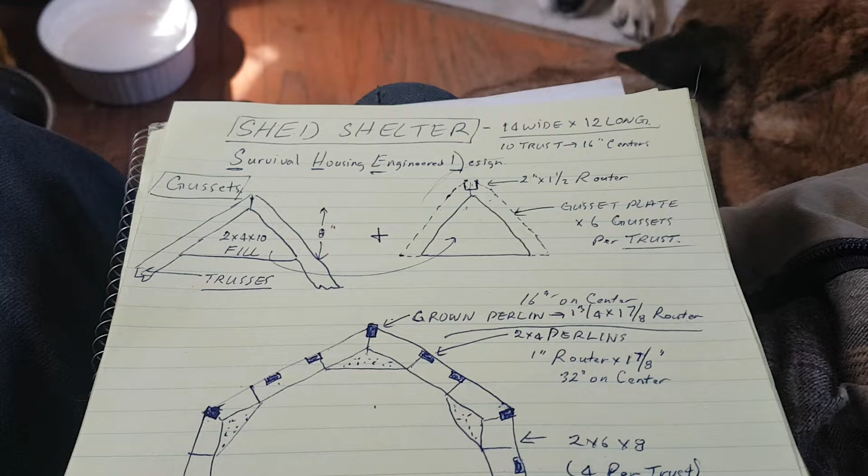I kind of drew this up quickly, so you guys can get out there and buy the material. Then I'll show you how it goes together.

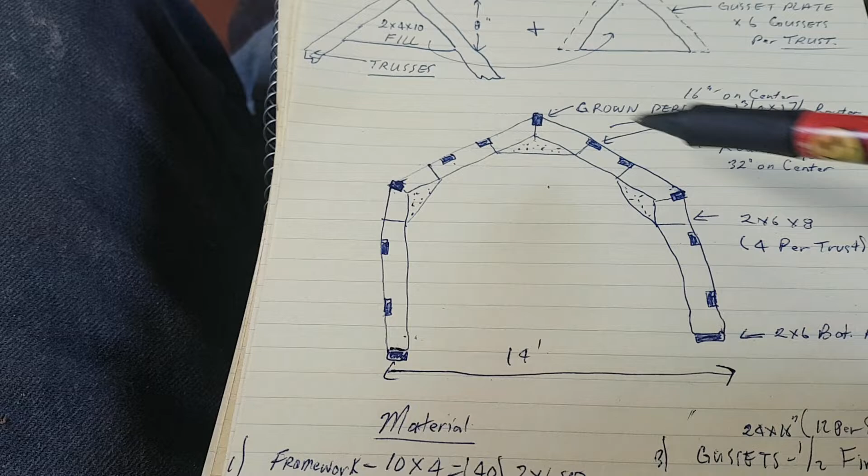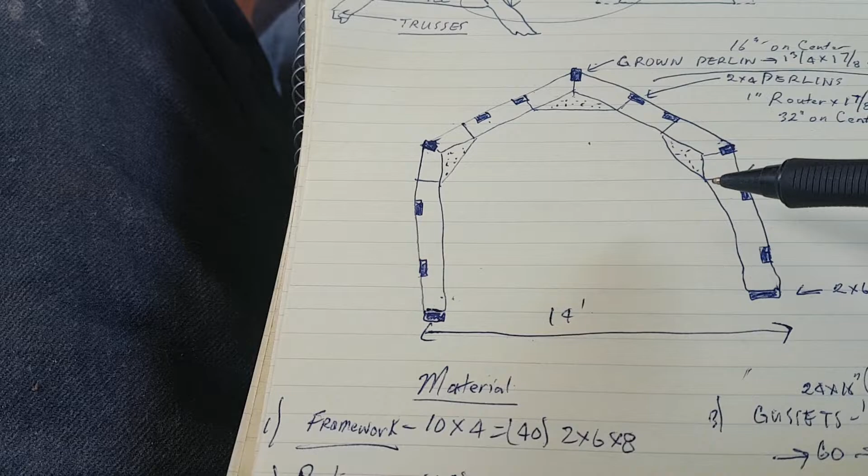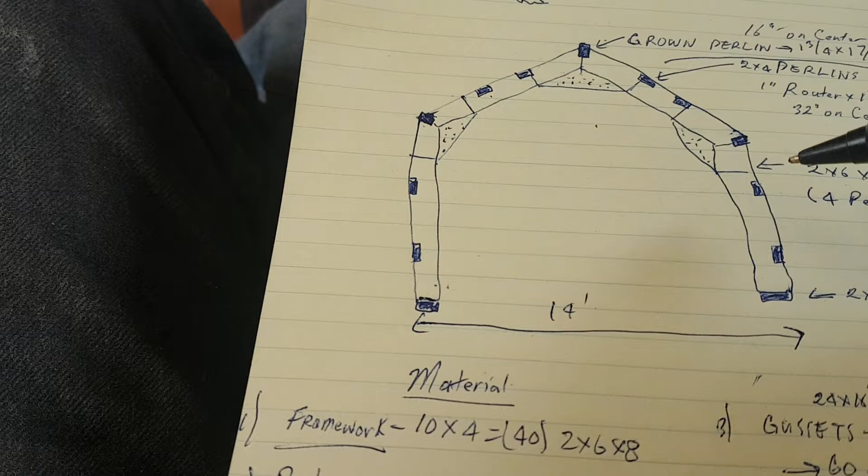Basically, what you have, these are 2x6s. You got 4 of them, and all together you would need, if you got 10 trusses, that would give you a cabin 12 foot long on 16-inch centers. You could place them at 24 centers or 32 centers, so you'd have to accommodate your purlins to adjust for that length.

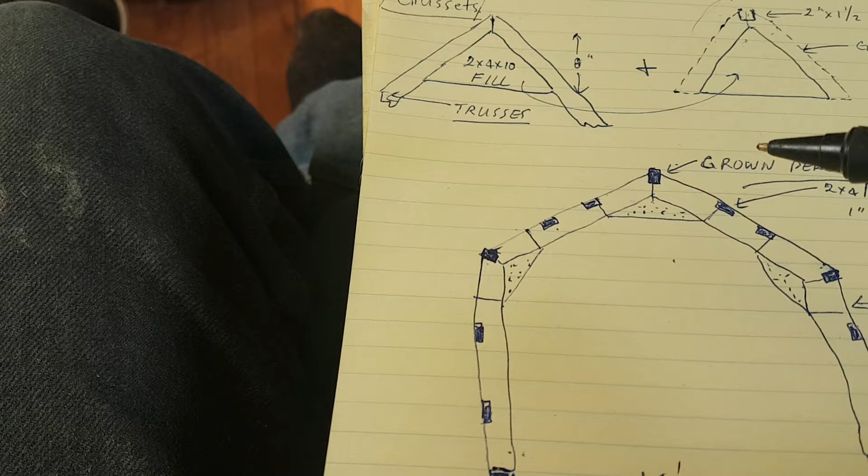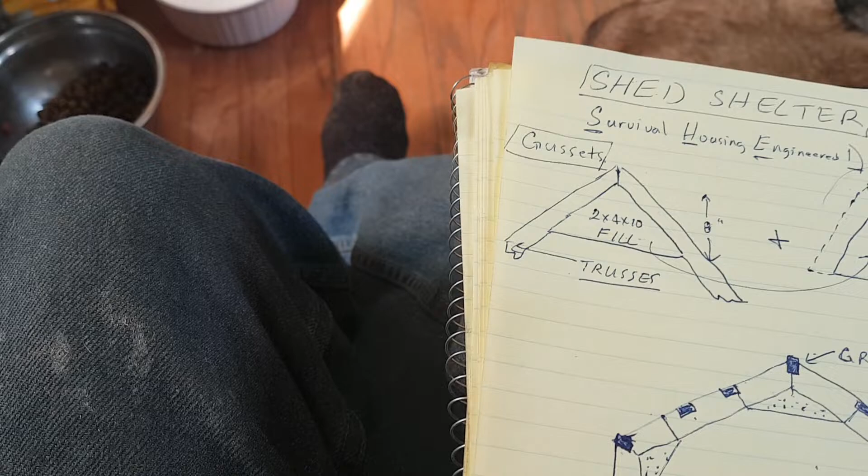But anyway, the main thing that makes this work is the Gusset Assembly. So this is your 2x6s here, right? This is where they're mitered together.

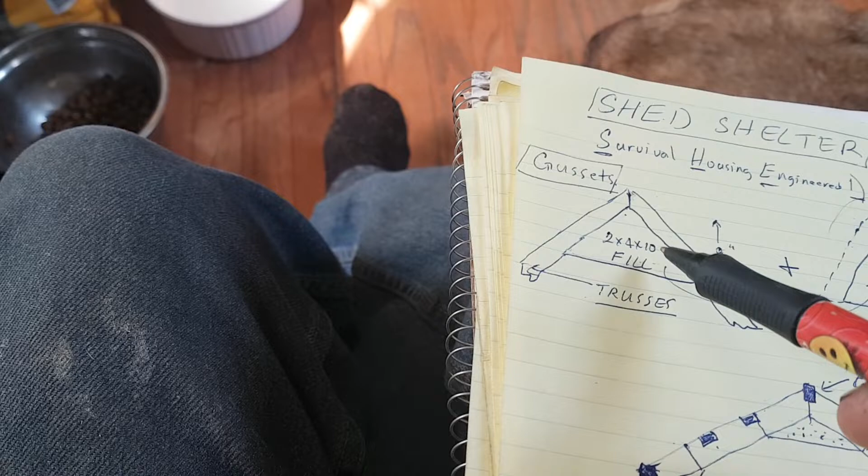As long as you know this angle, the first thing you want to do is pre-make your fill. So this is a piece of 2x4. You just draw your angle, set up your chop saw, and cut all these out. Make sure your saw is sharp and these are square, and you want your accuracy.

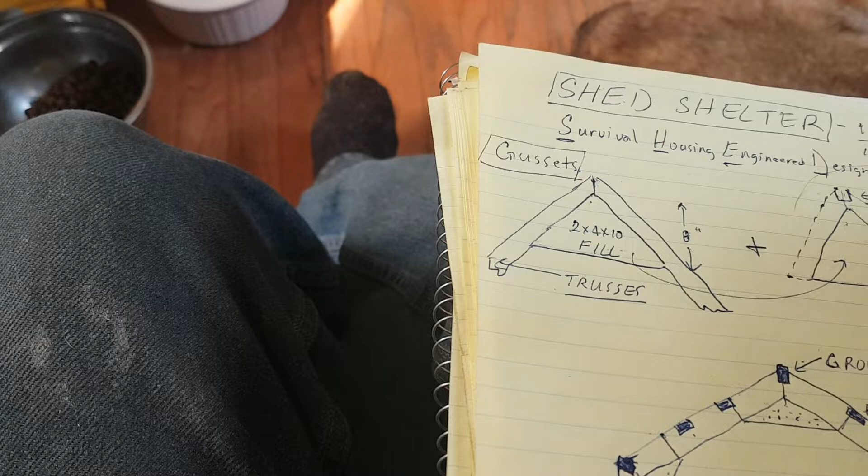Then you want to make your gusset plate out of 1/2-inch fir. Don't use OSB, spend the money and get 1/2-inch fir plywood.

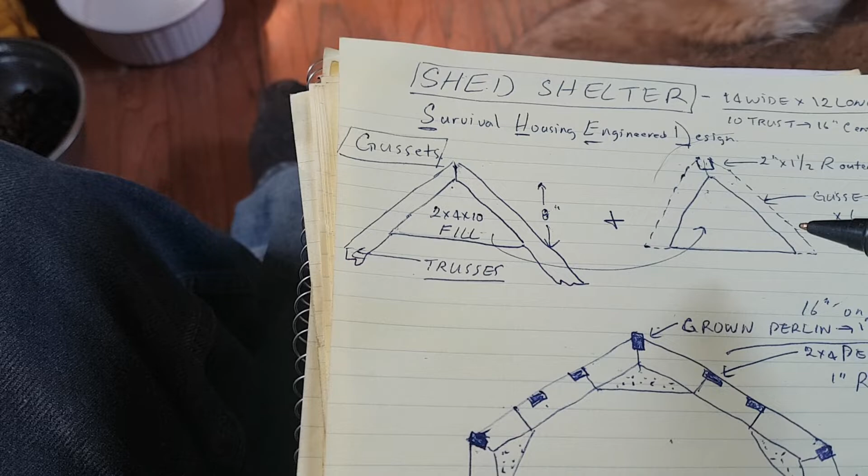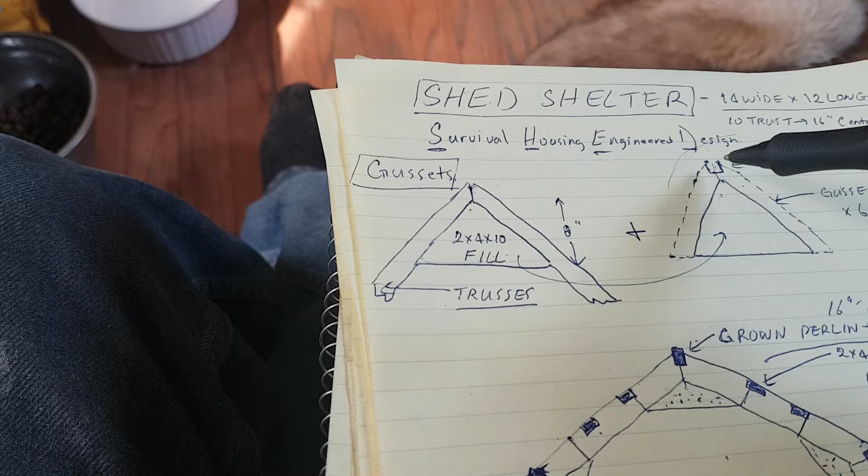Basically, your gusset starts from the bottom, so you have about 8 inches up to here, and if you're using 2x6, you would add another 8. So you actually use your gusset, if you're cutting it out square, it would be 24 by 16 inches high. You'd actually get 12 of these out of a sheet of plywood, so you need 5 sheets of plywood.

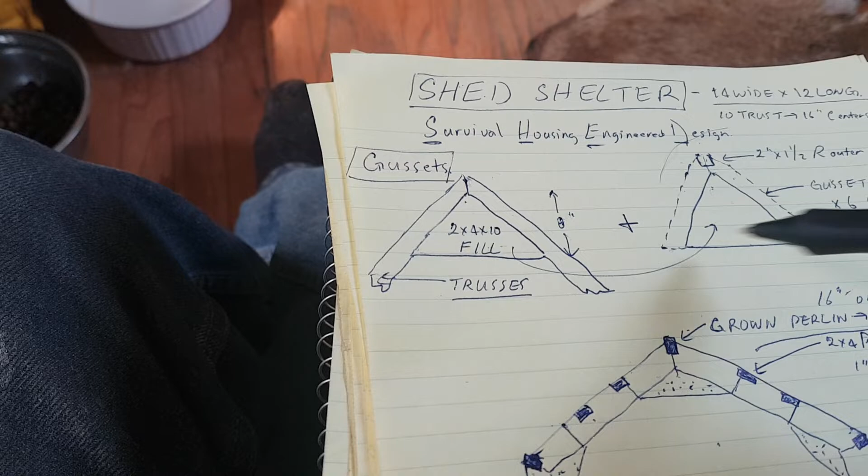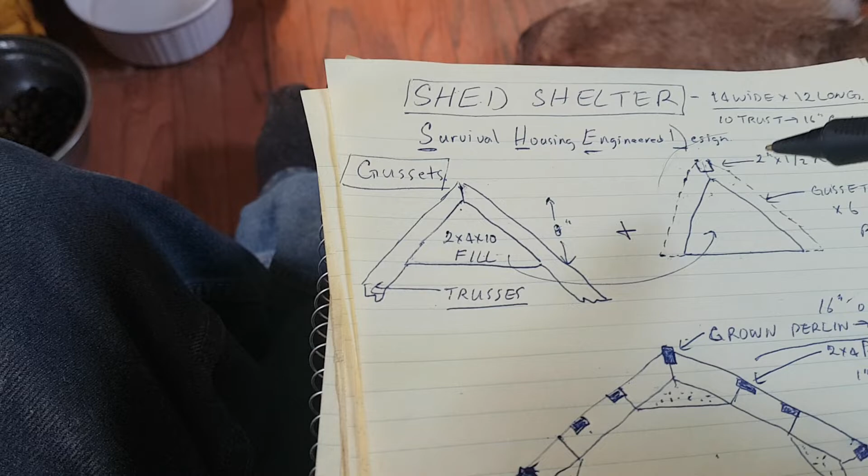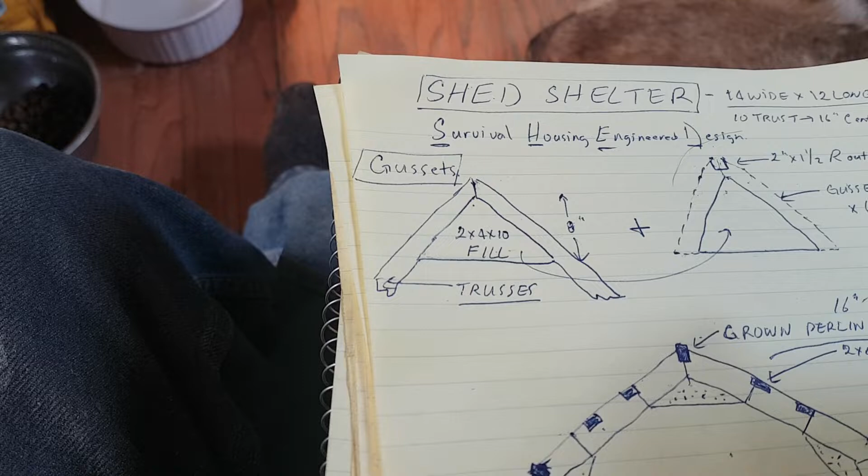And then you can set up your jigs to router the edges, trim off the edges instead of using a sander, and you can set up a jig to cut these out. You could probably do 6, because there's 6 of these per truss, so you could probably do a set of 12 at a time.

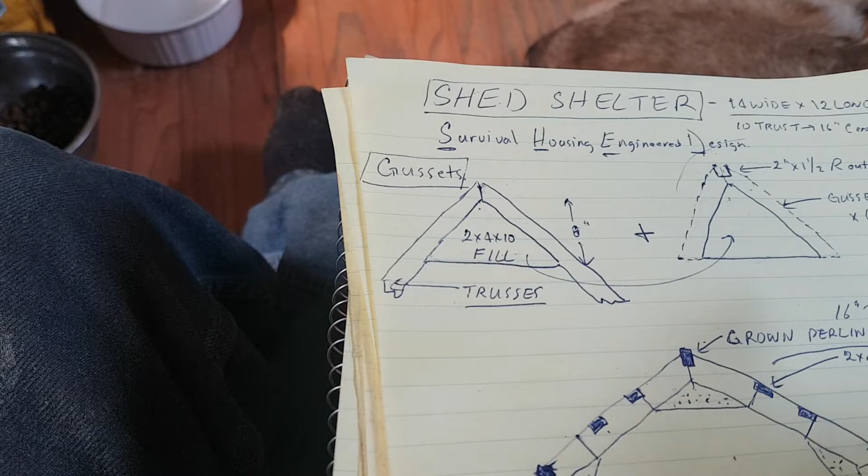So your main tool of choice is going to be your chop saw and a good router. You need a heavy-duty router.

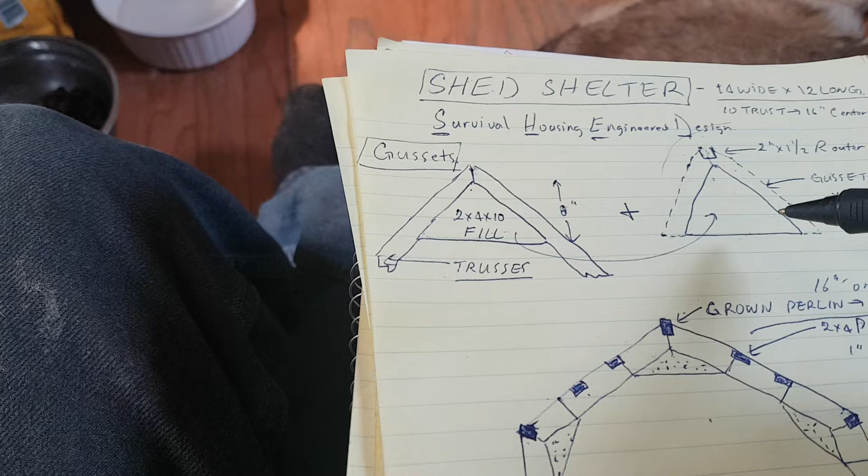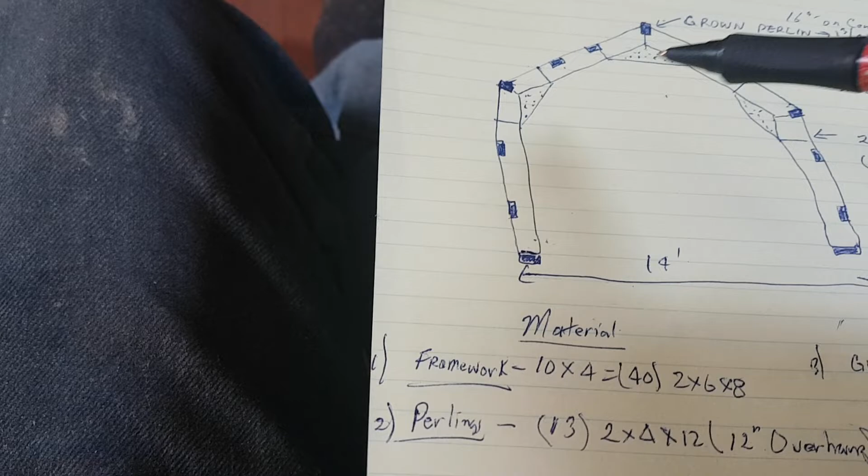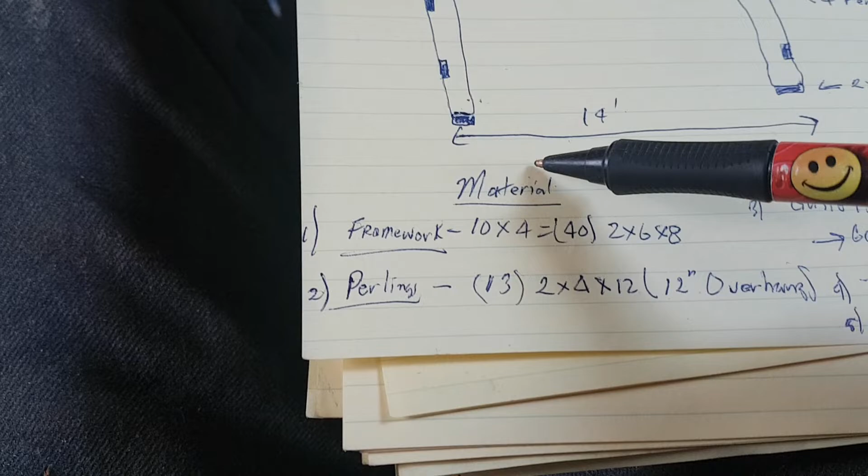So the overview on this: for material, you will need, if you're using this, 120-degree corners in here - I think they're same as a honeycomb. You will need 4 per truss, 10 trusses, that's 40. 2x6s by 8.

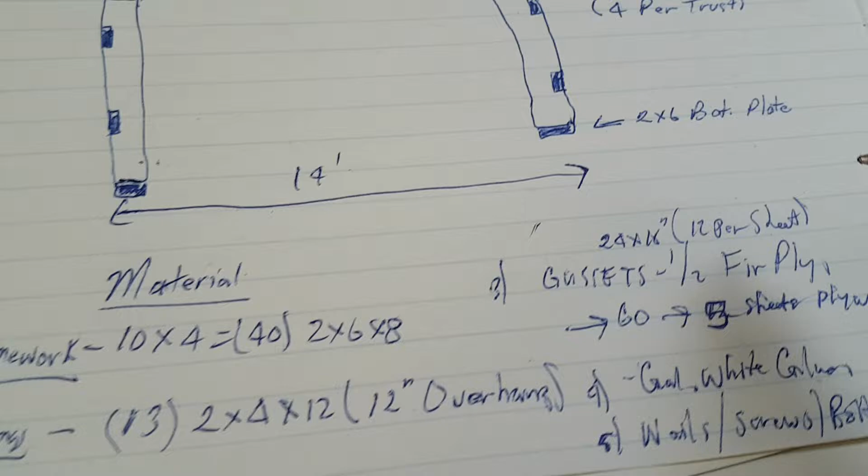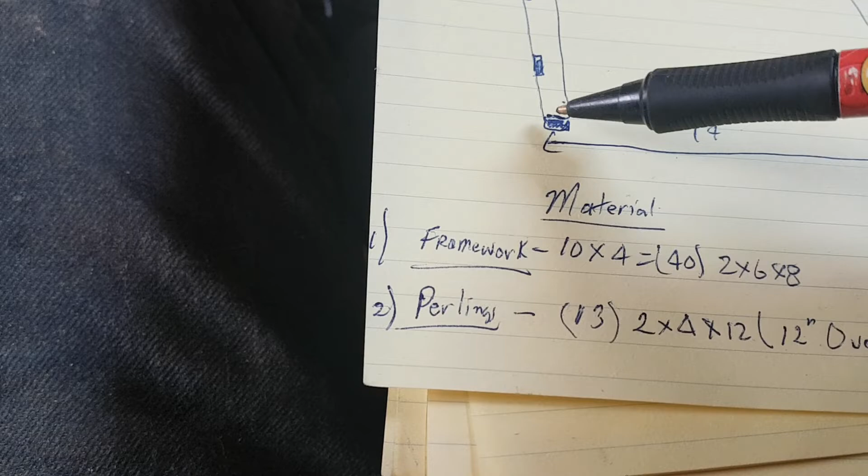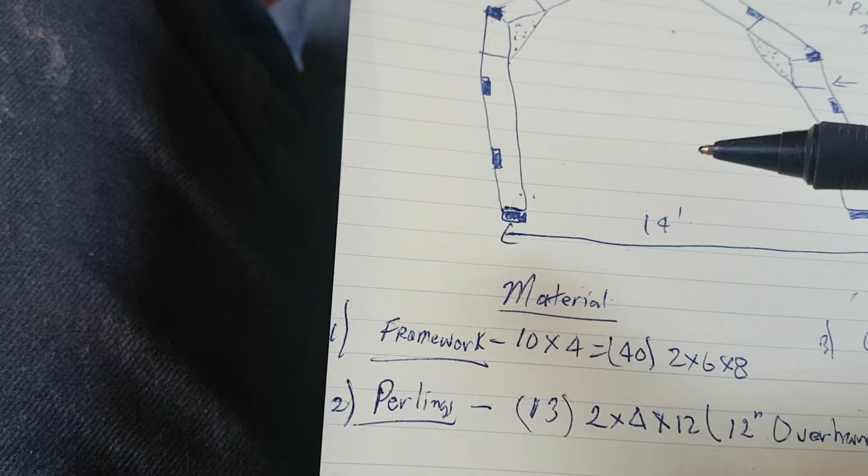You need 5 sheets of 1/2-inch fir for your gussets here. And for your purlins, which are these here, you need 13 per truss, and you could leave them at 10, but it would actually get 12 foot lengths, so you'd actually have a little bit of an overhang, a little bit of a cover.

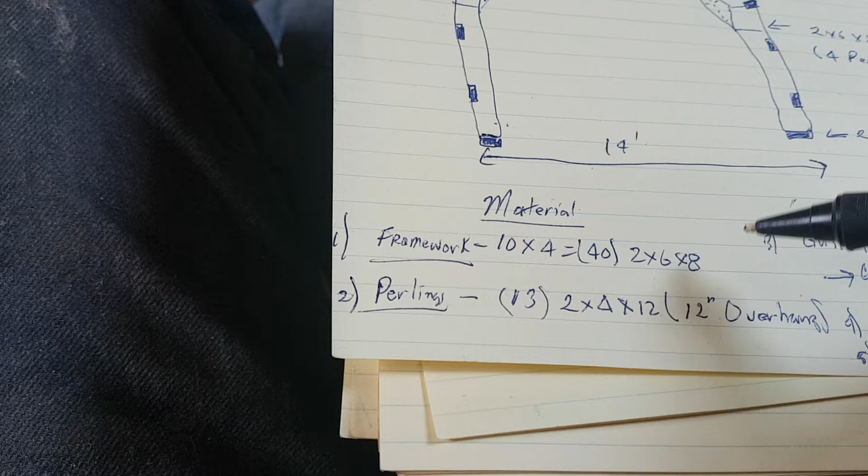So you would need 13 per truss times 10. No, just 13 per truss - 13 12-footers. That accounts for your feet.

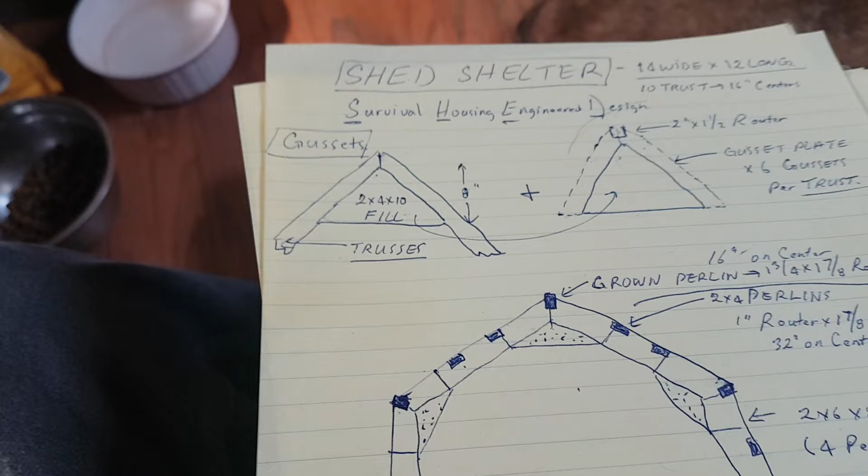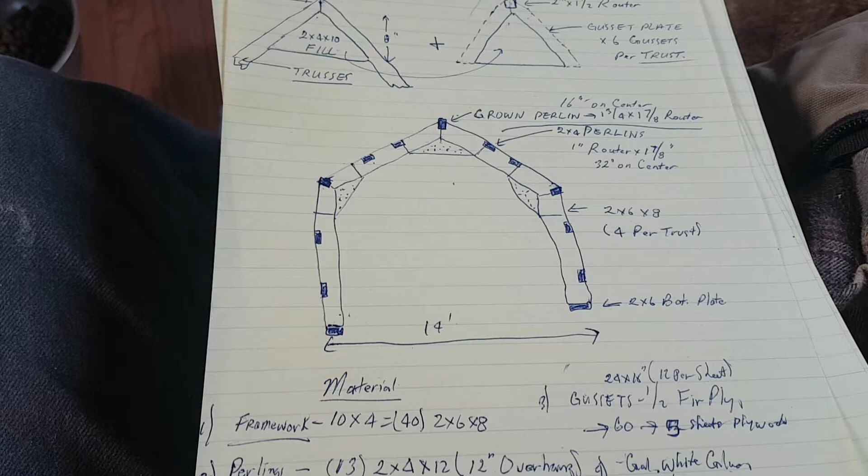So just going to put this up like this. I don't want to turn the camera. So you can enlarge this and just mark down the data.

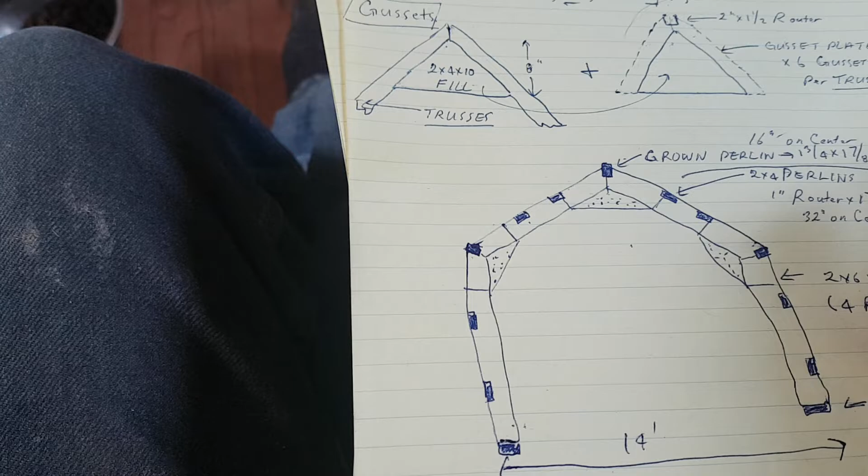But if you got a large nailing table, if you make your jigs, these can be fast tracked. You want to use glue on this here, white glue.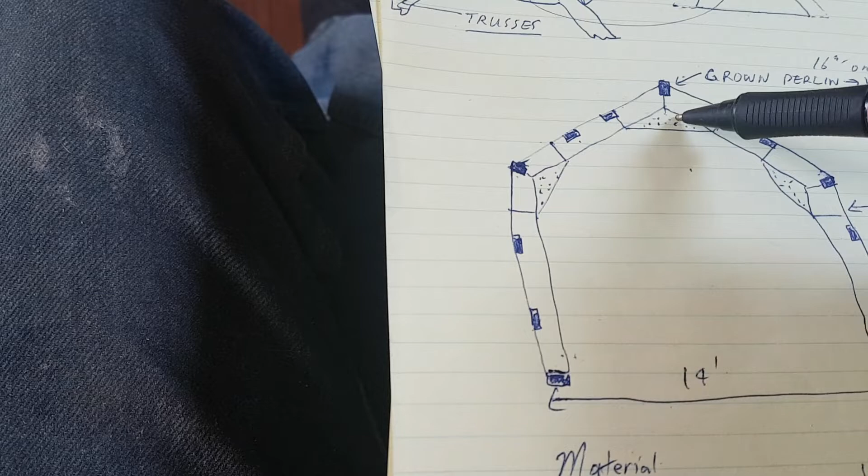And for nails, like these here would be nailed together. All your gussets, you can pre-make in advance, so they're all ready to go.

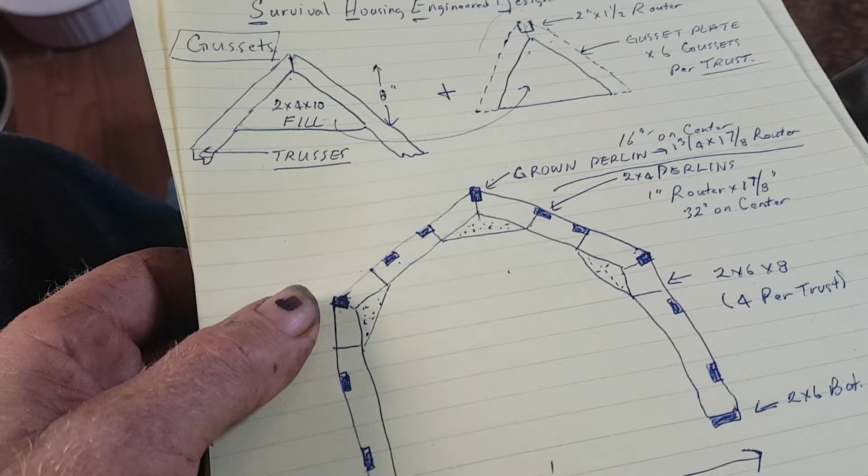And so you glue and nail this down, and you'd use a 2-inch galvanized, or you could actually put pound-in twist nails or ring nails.

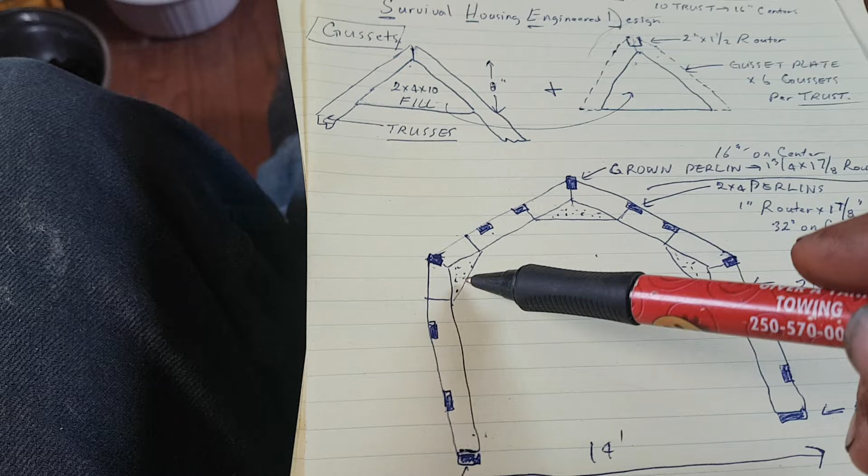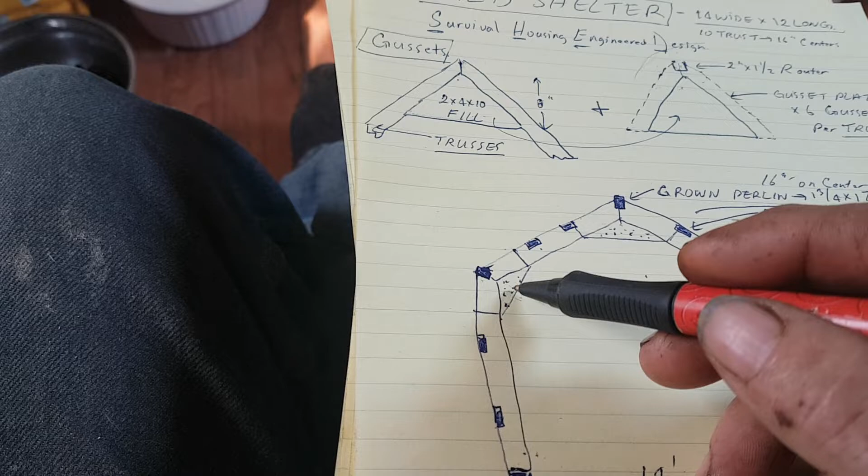But if you're going to mass produce these, you get yourself a framing gun, and you want to make your templates out of paper. And when you make your nails, you put your nails on 2-inch centers, then you make a reverse pattern for the other side so your nails don't bump into each other.

Yeah, that'll work. I'll show you that when I get to that point.

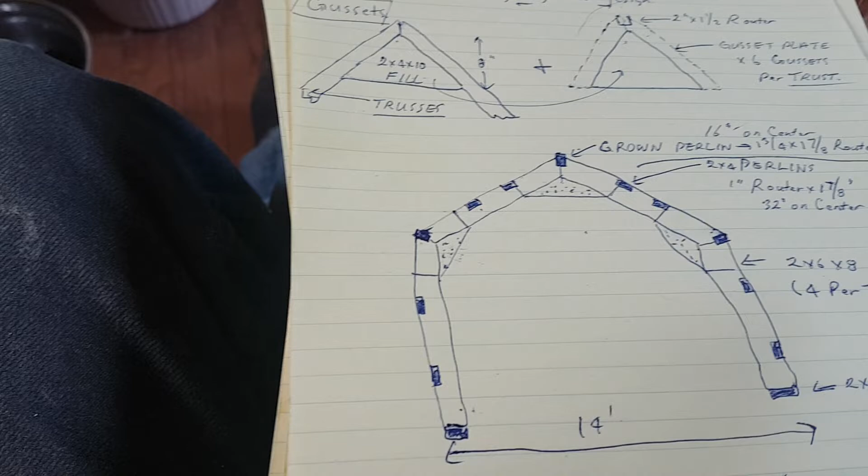So this would give you, when you got your trusses made, I think in the next design I would split it here, and I would split it here. Leave this as one setup.

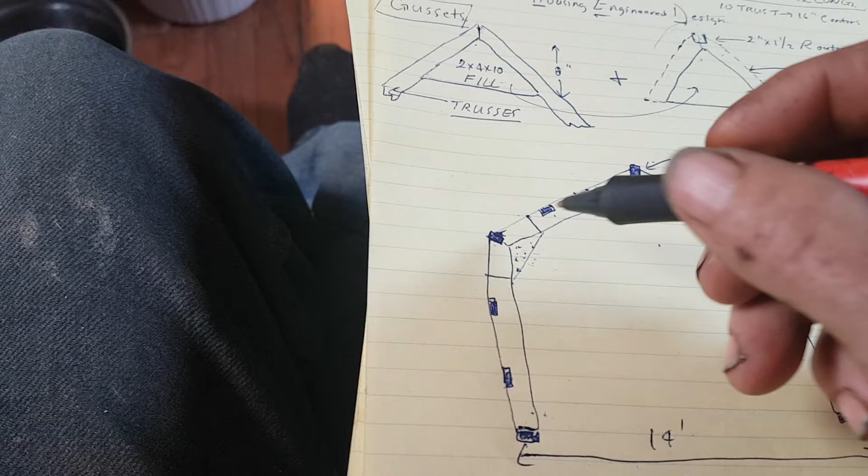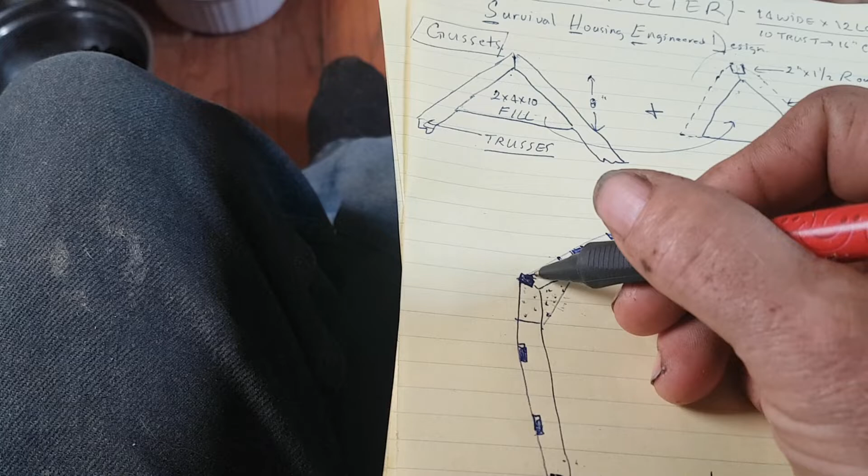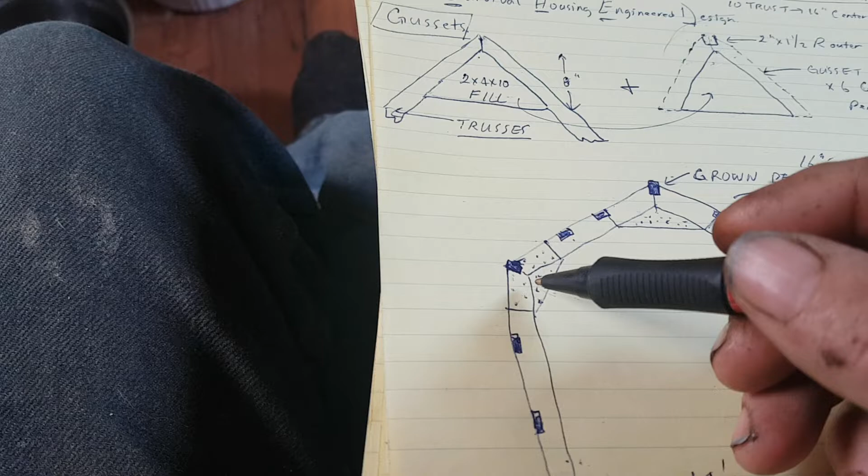So you just lay them down, make your first truss on the ground. You would have bolts here, like that. You need 3-inch bolts, just grade 5 fender washers. And these are all pre-drilled. All you do is fasten on your side walls and your roof components, right?

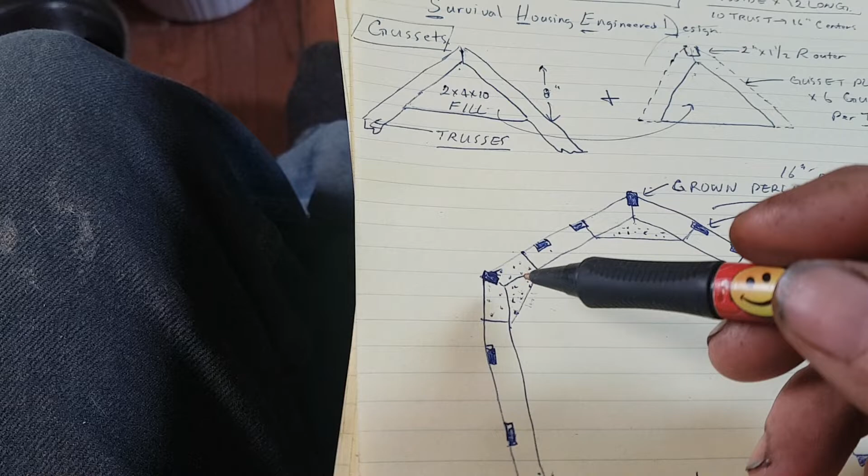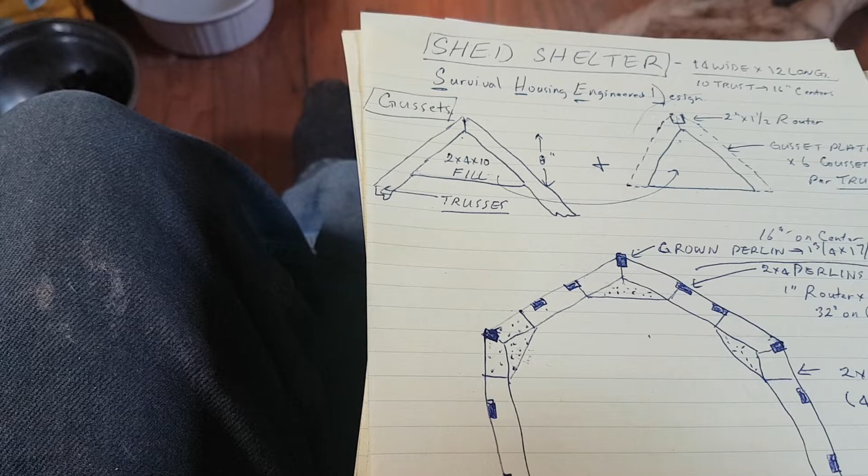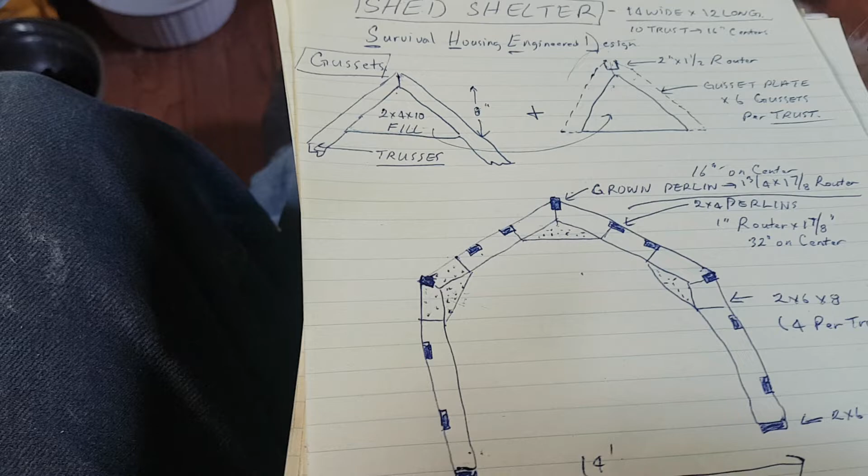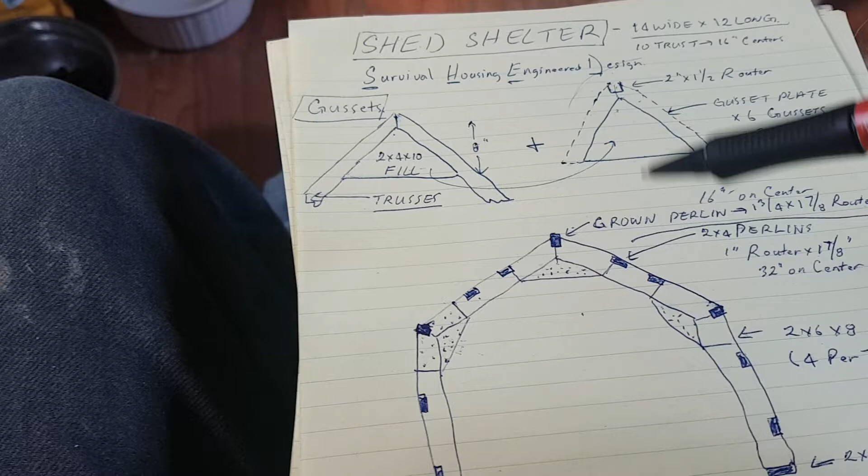Once you got the first one made, it's nice to have a table that you can work from. You can set them all up, so all your trusses are set up on a table. Once you got the first one set up, you have to hold it in place, and you can use a rope and a pulley system to lift them up, because it's a lot easier than even having 2 people. You just drop your legs to the ground, and you pull up the peak with the rope right there.

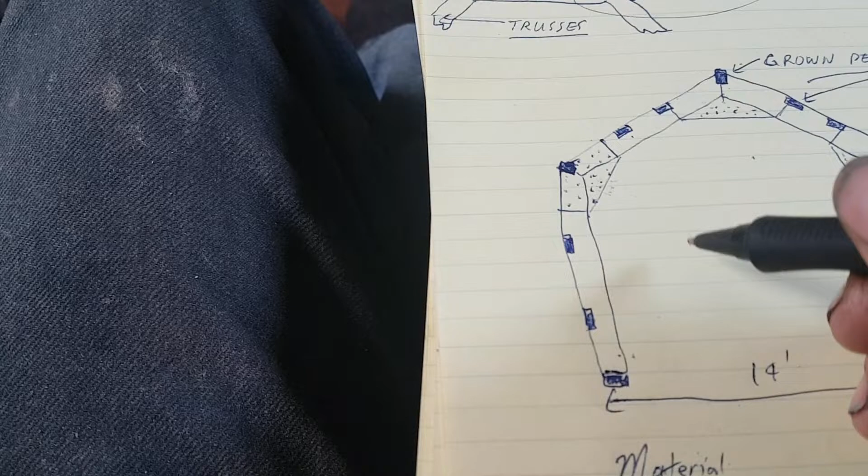And if you got your feet, let's see if I can draw this out for you. I want to draw out the bottom part. So this is your bottom plate.

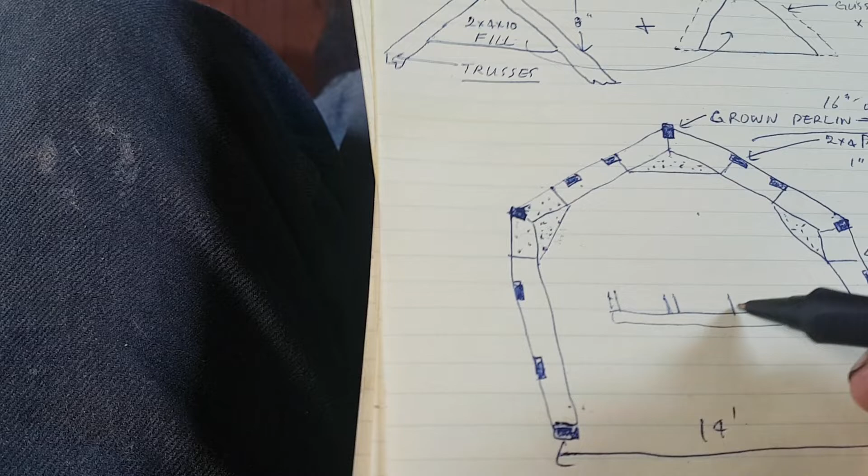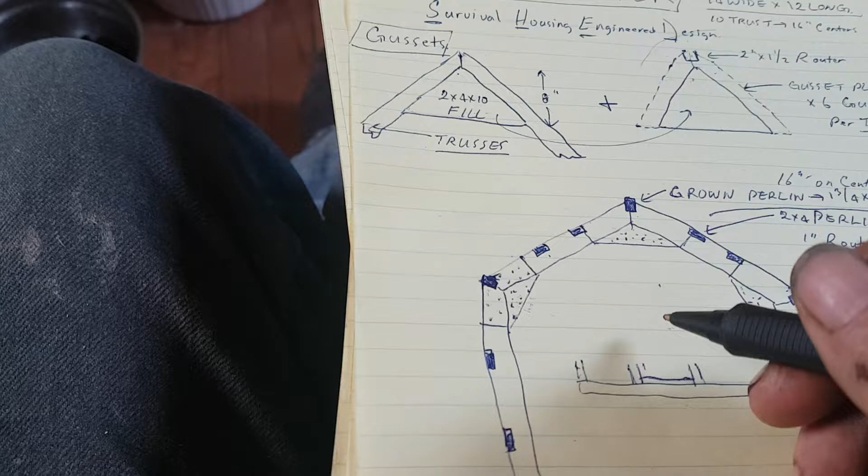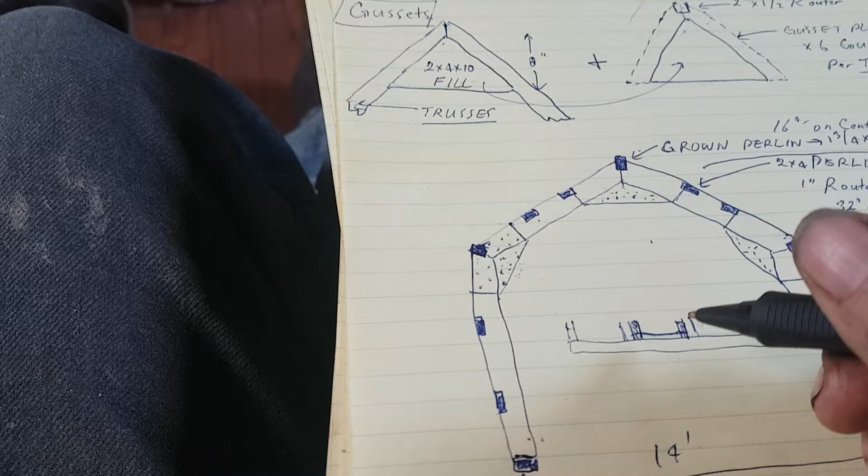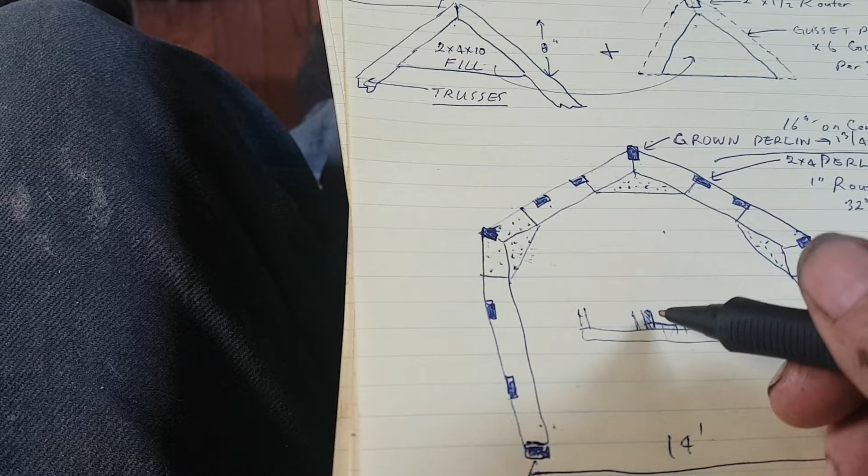What you would do, if these are your trusses like this, coming down, you fill this in with a 2x6 and take your leftover pieces from your gussets, and you do that. See, you nail your gussets into the side of the 2x6. So you make a bunch of these, you drop them in place, then you just nail them down, and you can bolt them through here. I would bolt them because you want to take this apart, but these gusset assemblies can stay. They can be permanent.

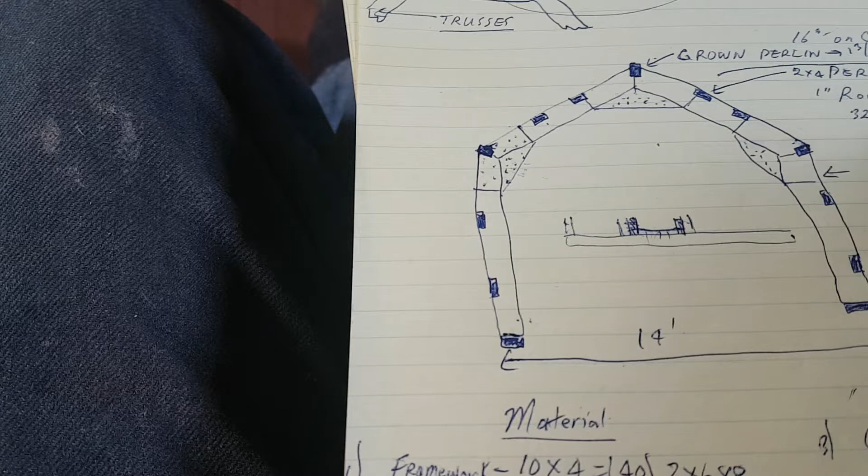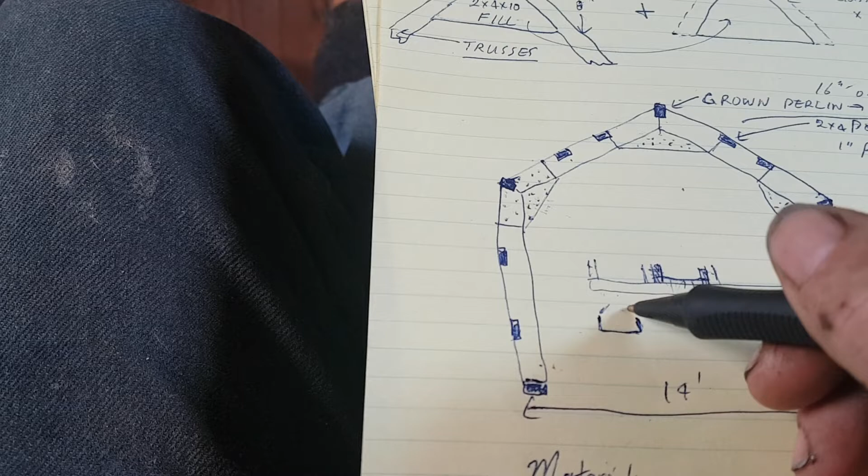And so at some point, what you would do, you want to make a shoe out of metal. So your bottom plate is going to be 5.5, 6.5 inches wide. So you want to form some metal like this, where you make it nice, where you could actually put a couple screws in there to lock it in place. Then you want to make up...

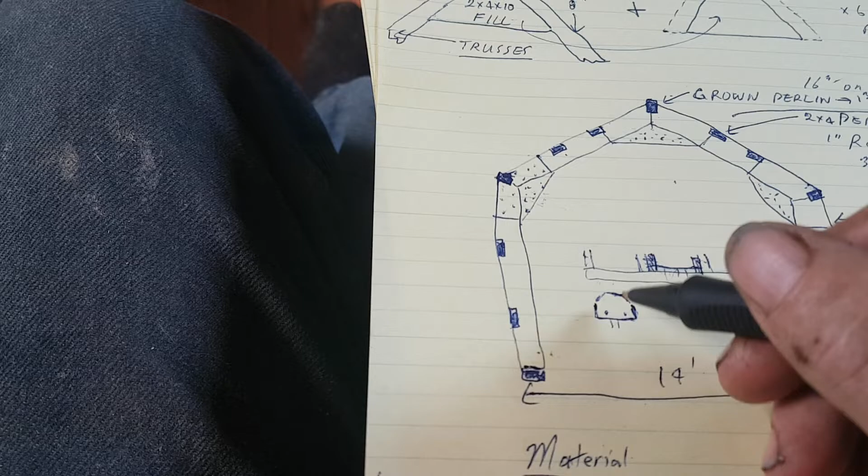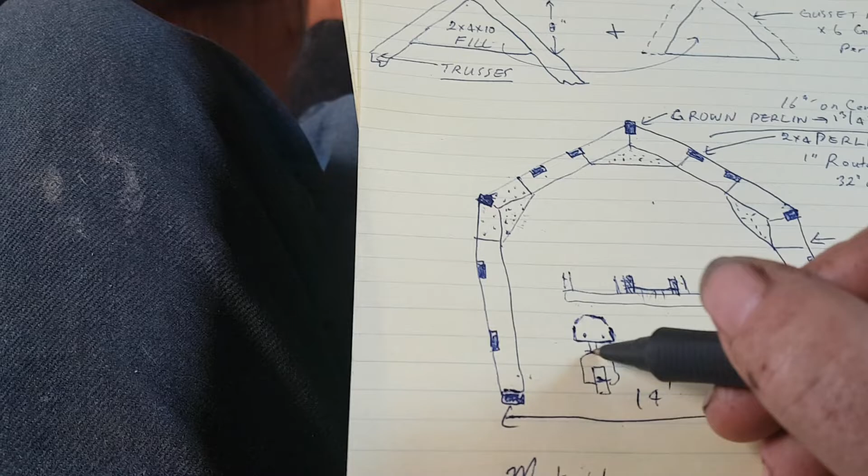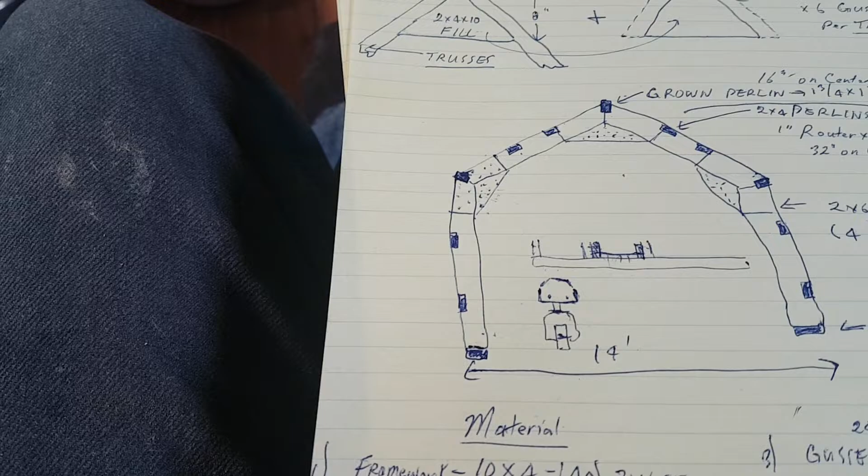Use a wheelbarrow tire. So this is your wheelbarrow tire here. And you welders out there can simply do that. You want this to spin, you want a good bearing set there. So you'd have 4 wheels on it so you can move it around. You can make it so you can take it off, so you could just pull these out. This can stay.

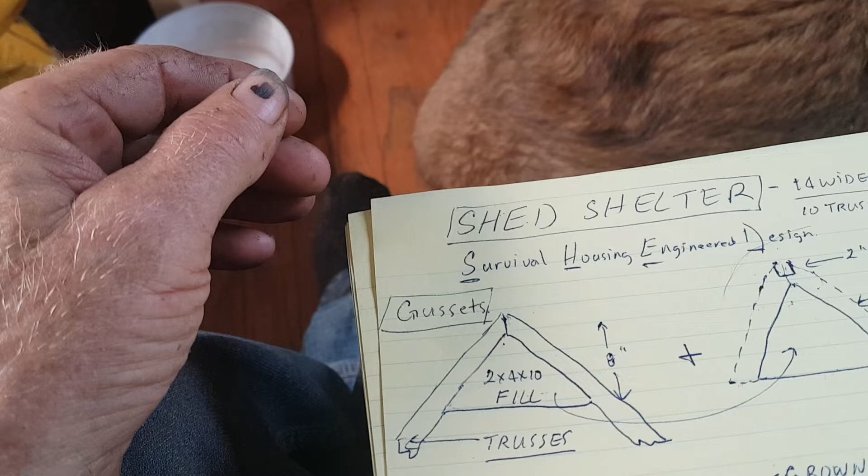So overall, you have a shed shelter. I actually have a name for it: Survival Housing Engineered Design, or something like that.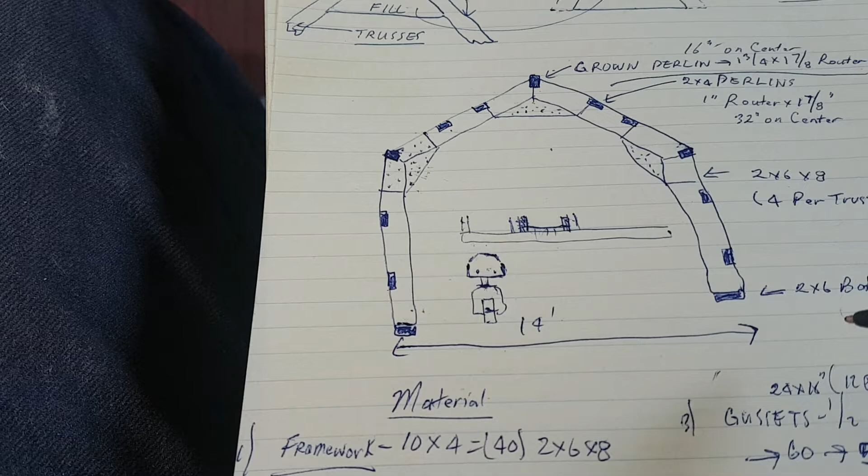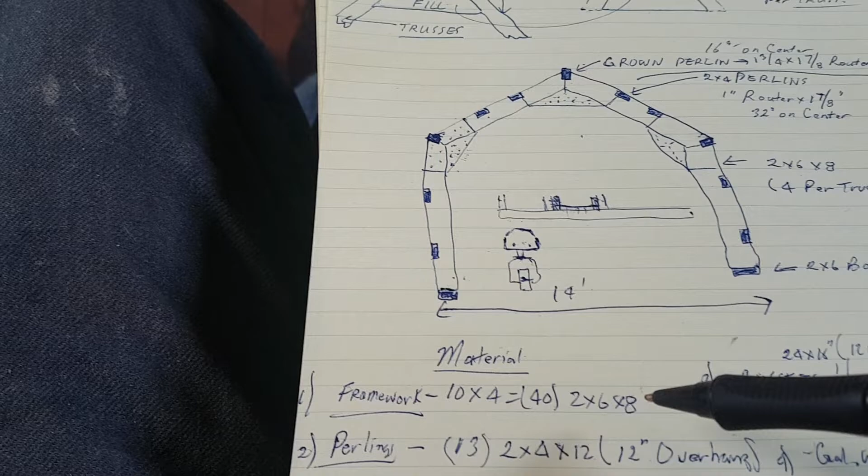So your material, your plywood's going to cost you probably the most. So again, your material list is 40 2x6x8s, that's going to run you probably $250. And 13 2x4x12, so that'll probably run you $100.

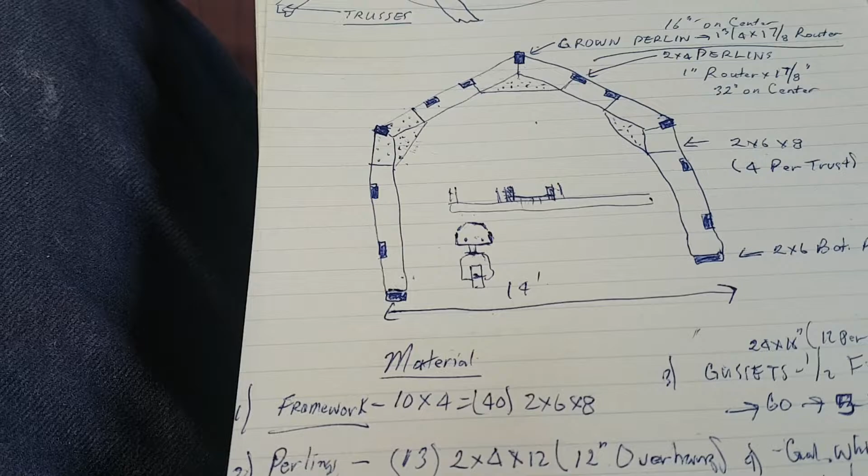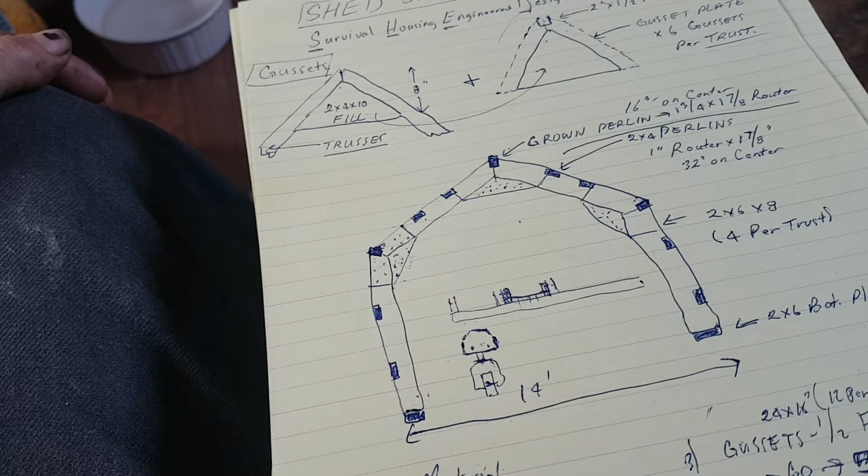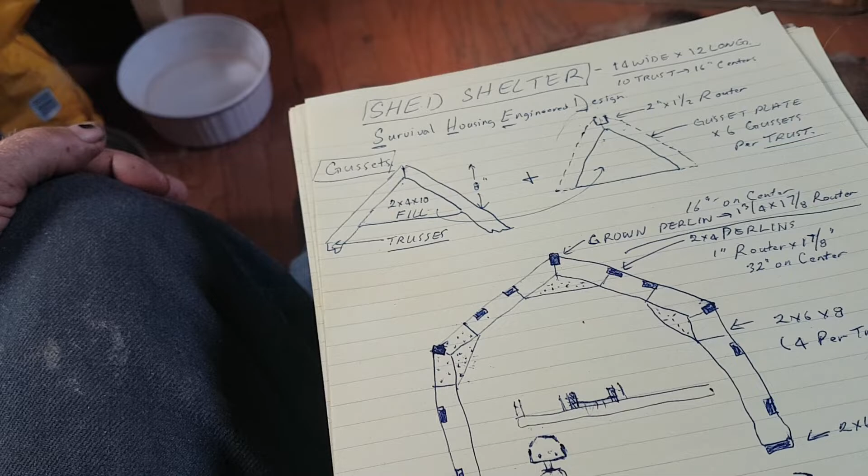So all in all, less than $500 in material for these, they'll probably go for about $1,200. That's what I was selling for, or $1,500. Whatever your material is, you double it: 500 material, 500 for your labor, and 500 for profit. That's how you do that.

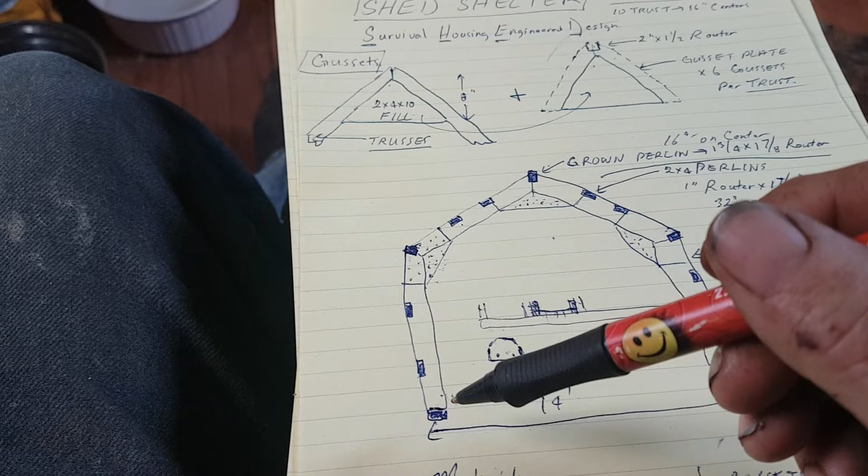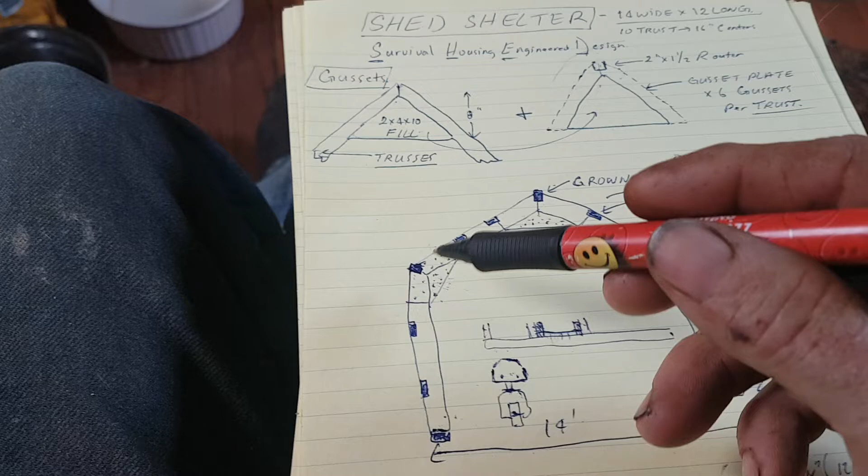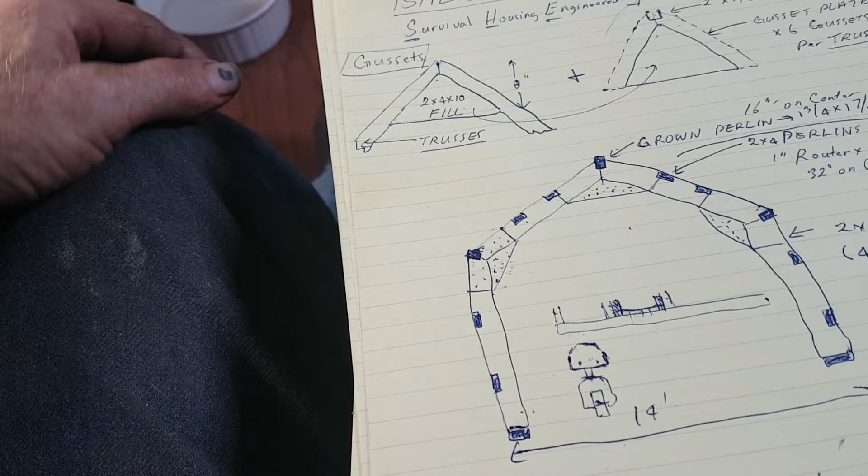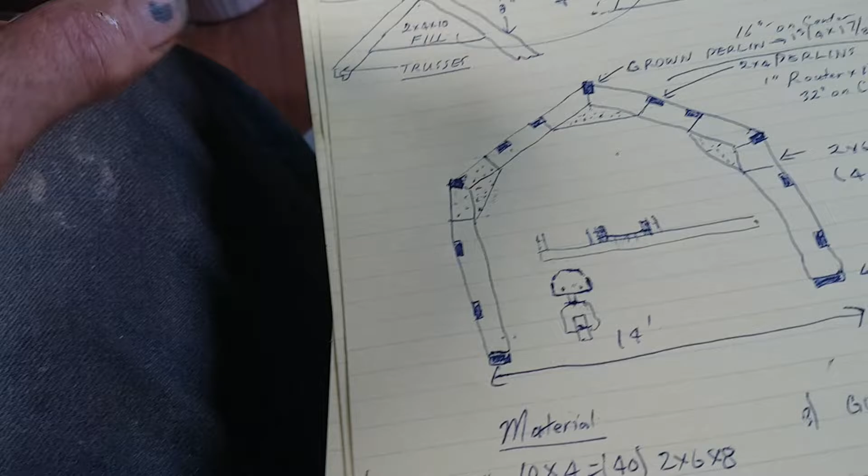And then you want to customize a tarp. These can actually be made for a Shelter Logic tarp. So if you had a Shelter Logic tarp, you could customize the framework to fit it. That'd probably be the smartest way to go, because all you have to do is order the tarps, or you can have the tarps custom made. So you would need 8, 16 times 2, 32. I would add another 4 feet for 36 feet in case you want to raise these up.

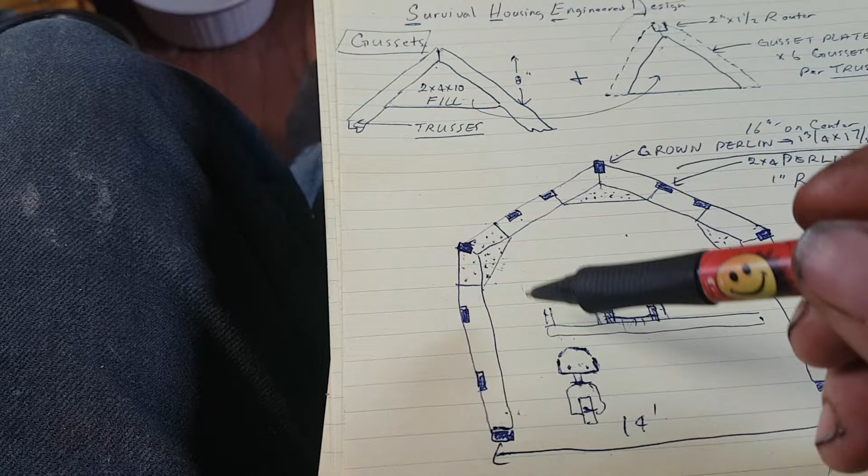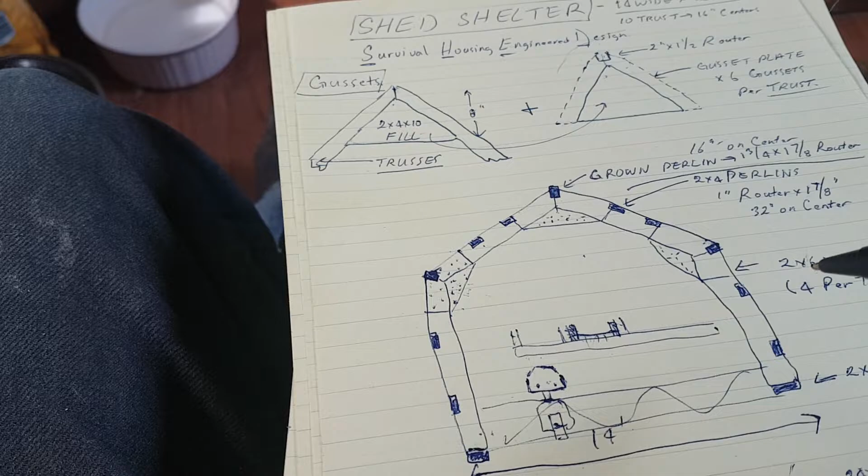So this design here will make a good shop for prefab and all this. Or if you want to extend these bigger, say if this was longer here, you could make a trussed floor system that would drop in place like this. Then you frame up your end walls, put your door in there, put your window set in there, and you're ready to go. Going to leave it here and get this uploaded.